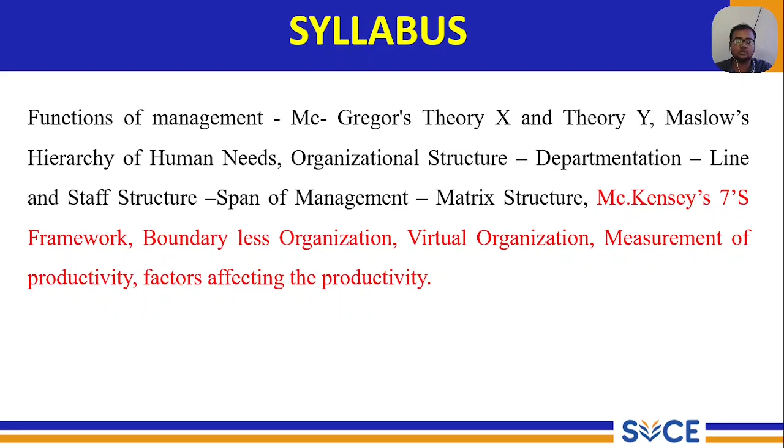This video will discuss the remaining topics in unit 1. In the previous video we discussed the functions of management, McGregor's theory X and Y, organization structure, span of management, and line and staff structure. This video will discuss the McKinsey 7S framework, boundaryless organization, virtual organization, and the last important topic, productivity measures.

First, we'll discuss what the 7S framework is about. As the name indicates, it was developed by a person called McKinsey. The McKinsey 7S framework is purely based upon the different S's involved in an organization, and it gives an idea about how effectiveness can be achieved in an organization through the interaction of these 7 key elements.

There exists a domino effect when any one of the elements is transformed to restore the effective balance. So what basically is a domino effect? It's an effect which happens on a positive note when you do something that corresponds to the next one.

For example, whenever you are planning to reduce weight, you probably get into the mindset of developing your own physical health. You get into two different kinds of activity: one, you start reducing and controlling your food, and second, you do a physical activity, both part of the objective of reducing your weight. So a domino effect refers to the effect that happens when any one element is changed, so as to restore the effective balance.

There are 7 S's involved, and all 7 S's are interrelated to each other. The core principle of the McKinsey 7S framework is shared values, which has an impact and a direct relationship with all the remaining 6 S's.

Those 6 S's are categorized into two segments: one is the hard S element, the other is the soft S element. The S's above shared values are called the hard S's: strategy, structure, and systems. The others are skills, staff, and style. They are called hard elements because they are easily identifiable and influenced by the leadership and management.

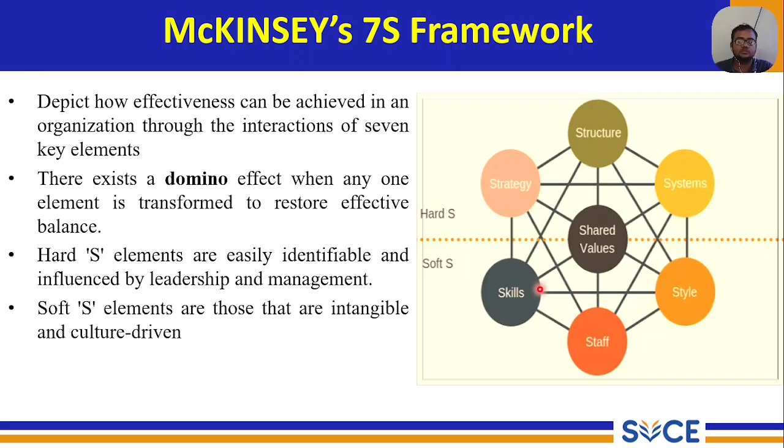A good example is your structure and the infrastructure available to a particular organization, which are easily identifiable and tangible, and are effectively influenced by the kind of leadership you have. So McKinsey's framework suits most organizations, be it product oriented or service oriented. This 7S framework is applicable to any organization.

Next, we'll look at the boundaryless organization. So what basically is a boundaryless organization about? They are also called an open organization. It completely eliminates the concept of having boundaries within the organization.

The basic four boundaries we see in most organizations are vertical boundaries, horizontal boundaries, external boundaries, and geographical boundaries. A boundaryless organization completely eliminates all these, meaning they have a dual direction, that is, bidirectional. The information flow is bidirectional, the money flow is bidirectional, and the material flow is also bidirectional.

So this includes the major advantage of having a boundaryless organization: it helps reduce the hierarchy and functional separation, providing an easier opportunity for the organization to have integration among different segments.

A good example of a boundaryless organization is Toyota, because they operate across boundaries—wherever you go, when the Toyota production system is followed, be it in India, Japan, or the United States, you see that irrespective of boundaries, they follow the same procedure and process. So it's easier for them to have an integrated approach when delivering a product.

So the key important aspect of a boundaryless organization is the bidirectional flow that happens throughout the organization, be it in terms of material, information, or cash.

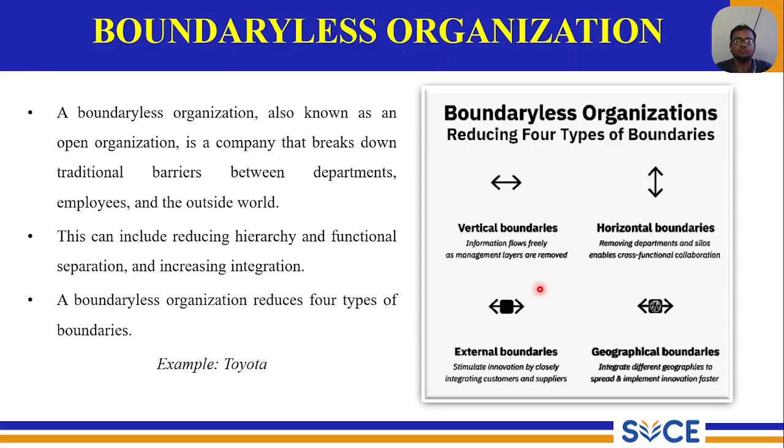The next set of organization is virtual organization, where there is a flexible business model that predominantly uses Industry 4.0 technologies like IoT and cloud. With effective utilization of these technologies, employees are able to work remotely.

The best example is the COVID times, where most organizations provided the opportunity for employees to work from home. They are more flexible and more decentralized, and hence the hierarchy is very less compared to other networks.

A good example can be Puma and Dell Computers, where employees are given the opportunity of working completely from home.

The core focus of virtual organization is product development and marketing. The manufacturing sector, research, and technological services provide support for the organization to run towards this product development, and the marketing firm and testing labs will also have a relative input.

With the availability of virtual labs and other features, companies are finding it much easier to adapt to this virtual organization.

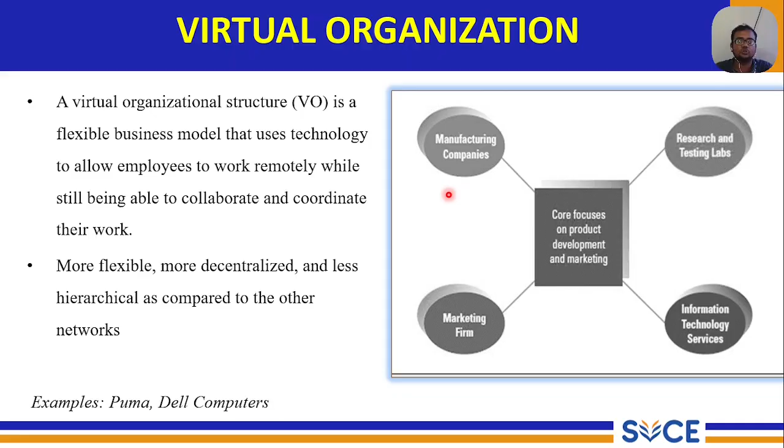Now we'll see about productivity, a key important measure of how you work in an industrial engineering environment. Industrial engineering is basically a technical management subject, so whenever a person is employed as an industrial engineer, whether product oriented or service oriented, the ultimate aim is to increase productivity without compromising quality.

We basically measure productivity in terms of output by input. Output can be in terms of labor, capital, or money. Input is the same thing - how much material is put in and how much labor we use.

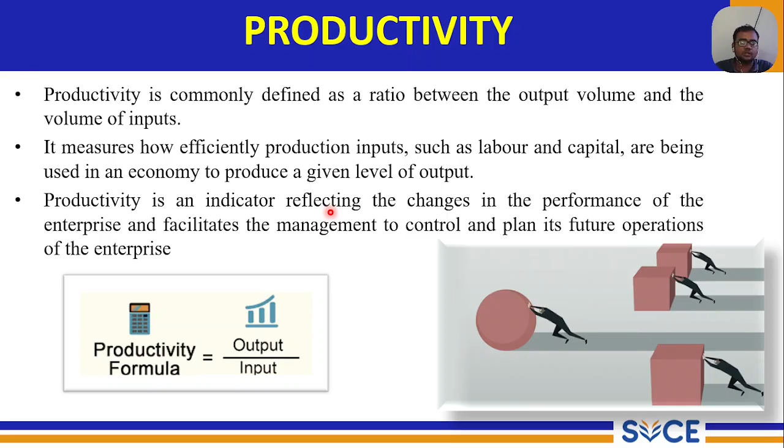So we have different segmentation of productivity. We'll see about that in the next slide.

Measuring productivity: we measure productivity in terms of goods or services which are produced - we call them the output. In manufacturing, we call them goods, and in service sectors, we call them the service which is provided. So how do you measure productivity?

You measure productivity first through partial measures. With respect to each segment, you measure labor productivity, machine productivity, capital productivity, and energy productivity. Once these are measured, you then measure total productivity, which is a combination of all those things individually. So where does miscellaneous fit in?

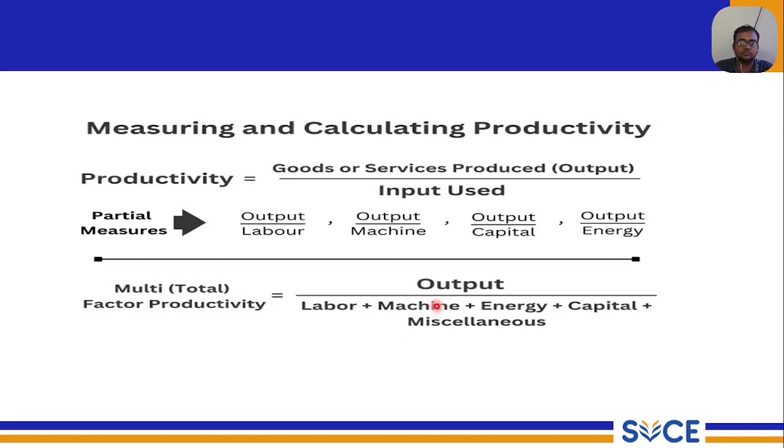Miscellaneous are the expenses - the indirect expenses, the overhead expenses which are involved in making this product. All these things add up to your denominator, which is the input, and the output will be the goods or services which are produced or delivered to the customers.

Material productivity: as with productivity, the basic measure is output by input. In terms of material, it is how much material is coming out of the industry and how much material is dropped in.

A good example is how you convert metal ore into steel, how you convert flour into baked products, and how you convert steel into cars. All these are your material input - the quantity of material fed into the production line - and how much output is obtained.

So how can you measure this productivity and how can it be improved? You can look for ways of reducing waste and scrap, and also look for cheaper materials, but at the same time it has to be ensured that quality is not compromised.

You can look for different ways of reducing material consumption through product design. The best example is the introduction of additive manufacturing, which completely eliminates the concept of wasting products through manufacturing.

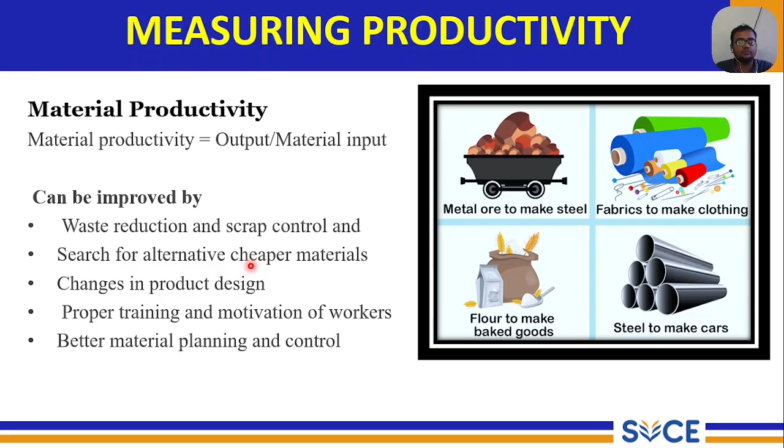You can also have better material planning and control. All these things help ensure material productivity is obtained by giving lesser input and getting maximized output. The second category of productivity is labor productivity, which is completely dependent on how much money is spent on labor.

So how can you improve labor productivity? You can provide training to the workers, and more specifically, you can have proper allocation of work.

As indicated in span of control, allocation of work is key important, because the worker who is more specialized in a particular work has to be given that particular work, and the one not as specialized can be clubbed with a different team, selecting procedures that facilitate easier transformation of work into a finished product.

You can also look at ways of improving the working conditions. Ergonomics is a key important aspect of this - we'll discuss ergonomics in the future chapters.

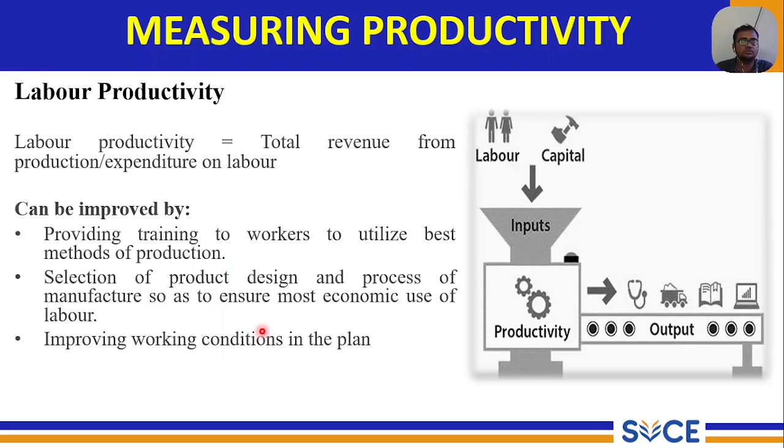The next measurement of productivity is capital productivity. Here you deal only in terms of money. It's predominantly about making or buying a decision. Whenever an industry or organization wants to manufacture a product, they first decide whether to make it on their own or get it from a third party. Getting it from a third party is a buying decision, while making it on your own is a making decision.

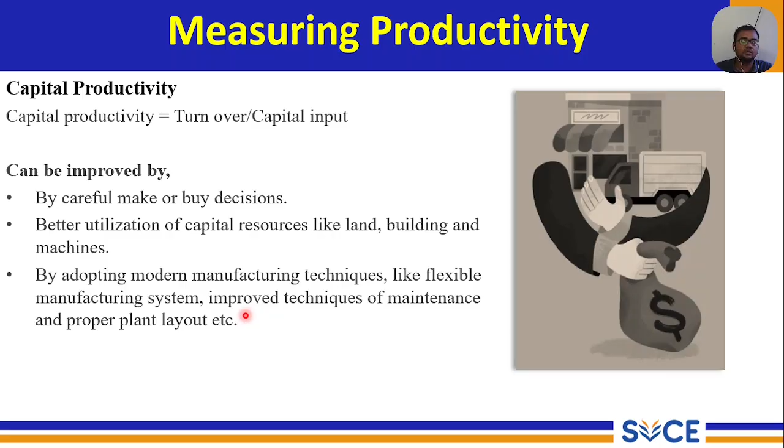So how can you improve capital productivity? You can have better utilization of capital resources like land, building, and machines. This is where OEE, overall equipment effectiveness, comes into play, measuring how much effective utilization of machines is achieved. You can also use modern manufacturing techniques like FMS, flexible manufacturing systems, to help ensure proper utilization of available resources.

The next productivity measurement is machine productivity. It's about how much utilization is done. What are the processes or methodologies to study this? The first is method study, which you will discuss in detail in Unit 2. There are various methods of measuring productivity through machines.

There are process charts involved in it, Simo charts, memo charts, and many such options available. These are key aspects of measuring machine productivity. You can also bring in Industry 4.0 technologies by utilizing IoT, cloud, and other technological aspects, which can make improving productivity much easier.

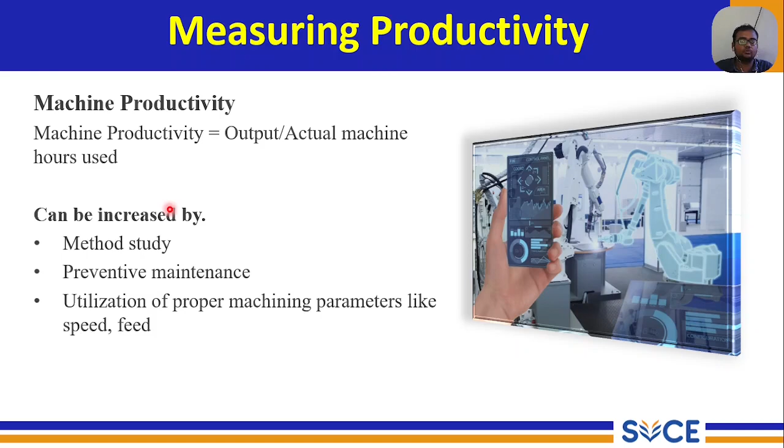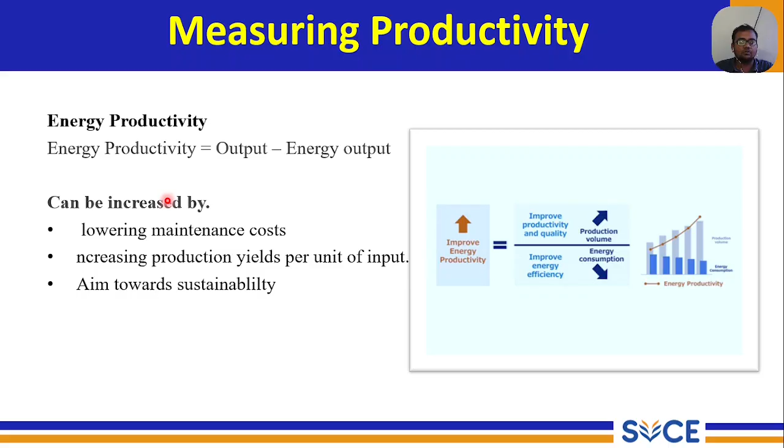The last productivity measurement is energy productivity. It's completely about how much energy is used. As every industry strives towards sustainability goals, SDG goal number 12 says you must have responsible consumption of available resources. So you have to be careful about how much energy is utilized or spent for manufacturing the product.

We'll see a basic example of how measurement of productivity is done. A company manufactures 24,000 components employing 100 workers, with an 8-hour shift. They now want to employ additional workers because they've received an order for 6,000 additional components. They have three options: increasing workers to 30, 25, or 20 more. We need to calculate productivity based on the number of laborers, since the condition specifically concerns the workers.

Since the condition here is specifically about workers, we'll go for labor productivity, where labor productivity equals total number of man hours divided by the total number of hours the man will be working. So for 24,000 components, you'll be working about one component per man hour when the number of employees is 100 workers, which is the current productivity measurement.

Now the condition is they have an additional order of 6,000 components, so they have to look for options to improve. You need to ensure that the present productivity is not compromised by employing these three options. Even if you go for 30, 25, or 20 additional workers, the current productivity should either be closer to this or exceed it, but definitely not fall below it.

For the first condition of employing 30 additional workers: the current production capacity is 24,000, and the additional component requirement is 6,000, so the total production requirement is 30,000. Once you have this total production requirement of 30,000, the current employment work with the additional number of 30 workers means it will be 100 plus 30, which equals 130 workers.

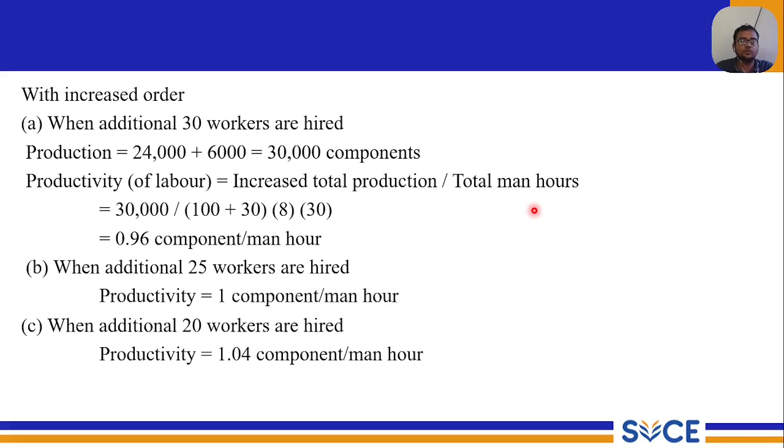So what are the inferences you get here? As an industrial engineer, you have to make a proper decision, because you cannot deny this—this is bound to happen. You may sometimes get an additional order or sometimes a lesser order, but as an industrial engineer you should find an optimal way of managing them. So what is the number of workers you need to additionally employ here?

The inference here is that production has clearly increased by 6,000 units, which you cannot deny. This is closer to 25% of the actual production which has happened—so there is an increase of 25% over the actual production.

The labor productivity falls below the initial level of one component per man-hour if more than 25 workers are hired, so that cannot happen. You have to ensure that the current working condition is achieved. As an industrial engineer, whenever you deploy additional resources, the current working condition has to be achieved, or you can exceed it—definitely not go below it.

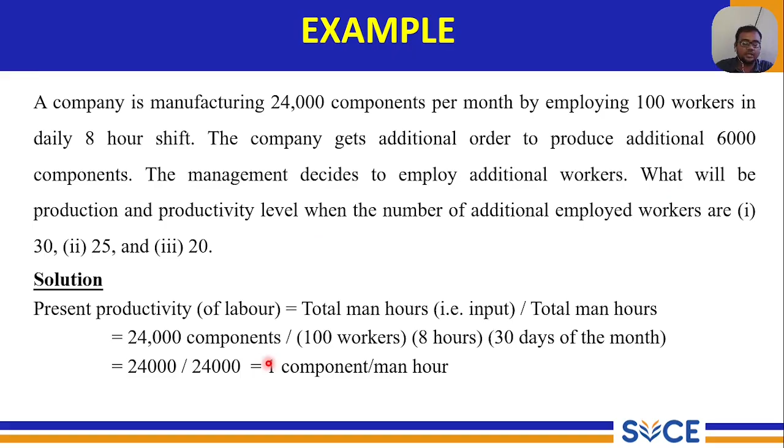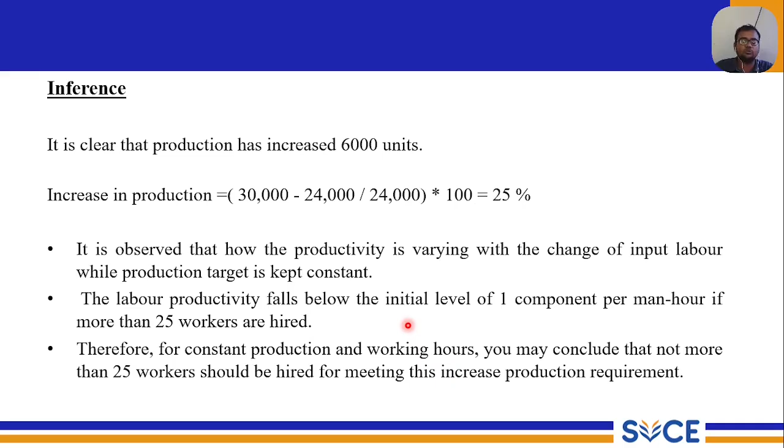So the final conclusion is that not more than 25 workers should be hired for meeting this increased production. If that happens, the productivity is going to decrease, and it is going to cost the industry a huge amount.

Now this is an assignment which I want you people to do, and the corresponding questions will be posted here. You need to answer for the same—you have to find the productivity per machine hour, compute it, and also draw your interpretations depending upon the case-to-case basis. So as an industrial engineer, what is the ideal condition? What are the differences you have made based upon these calculations?

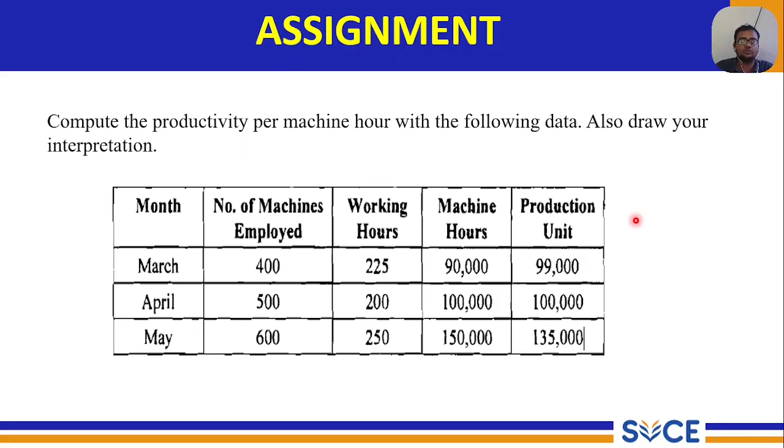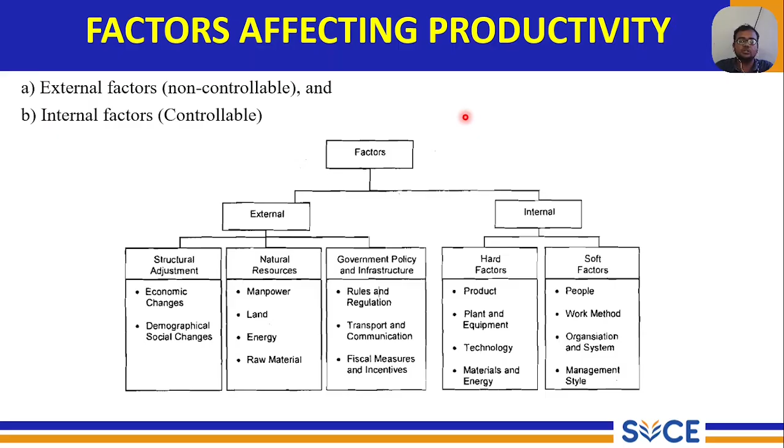Unit 2 is more specifically focused on the process, the time study method, and the method studies, which are directly focused upon the improvement of productivity. So the remaining videos and contents of this subject, Industrial Engineering Management, will be more focused towards improvement of productivity through different measures. We'll see about those tools and techniques in the forthcoming videos. Thank you.